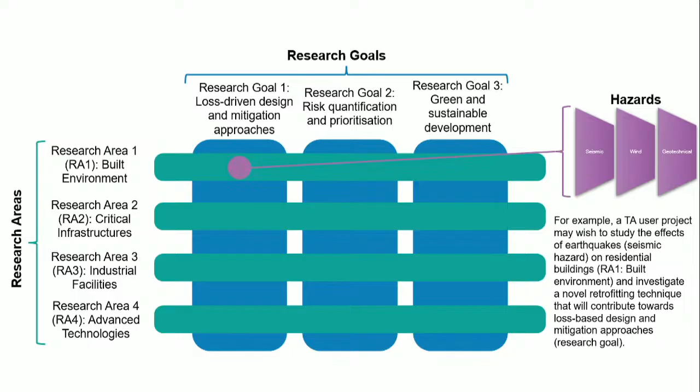Maybe it fits in one of those boxes or many of them, but at least it fits the bigger picture. This is presentable and communicable to people who are non-technical, who are going to make important decisions in the future. I give a simple example here, but all of you could find your own relative example on that slide.

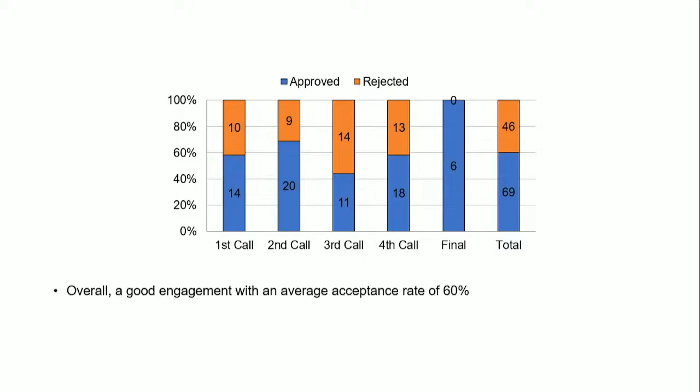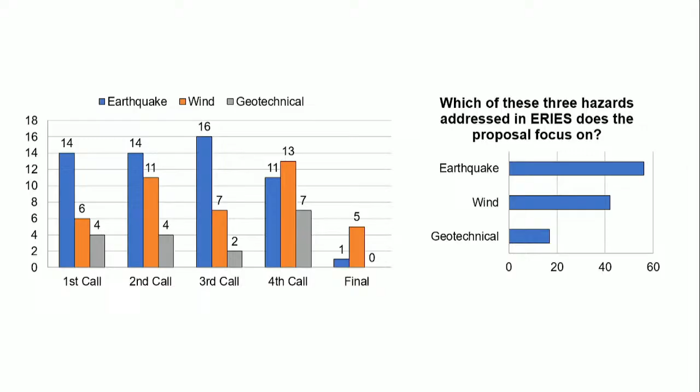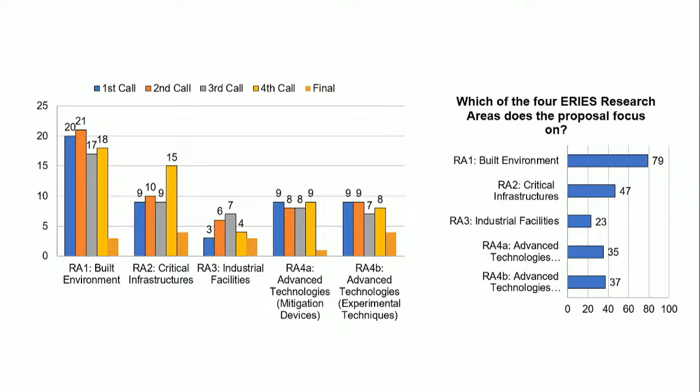In terms of the research areas, you can see the built environment is a lot more popular, I think, because it's related to what we're doing every single day, like the place where we're sitting right now, where we slept last night, maybe where we're going for dinner later on today. This is all the built environment, so I think it's more common, but you can see there's a good interest across the different research areas that we were proposing.

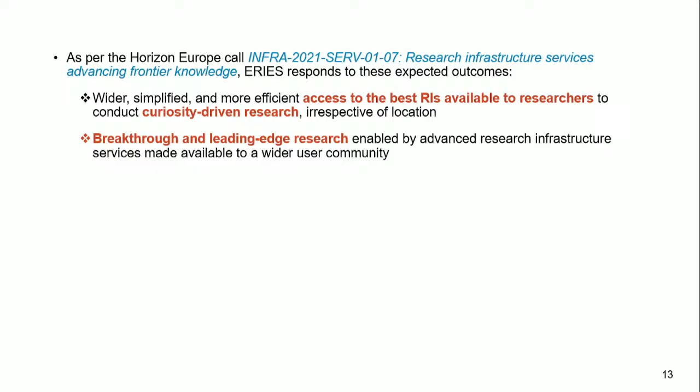So this idea of curiosity-driven research, this is what we're trying to achieve. Breakthrough leading-edge research to enable all of this to happen and to make it available to the wider community. This is what they're trying to focus on. Also to harmonize and have a broader exploitation of the synergies across Europe is something that they're interested in. So you can see on the map on the previous slides, I think we're achieving that. Everybody's working quite well together.

And also a new generation of researchers. So the idea that a lot of young researchers are coming up through the ranks and are involved in a lot of these projects. I think I have some stats in some other slides that I can show another time. And it's one of the reasons why we have this Young Researcher Award, which we'll talk about later on today and tomorrow. But to have a new generation basically trained and that can exploit all these new tools and all these new infrastructures to conduct the research.

And also the cross-disciplinary fertilization. So the idea of the different communities are coming together now, and this is, I think, we've achieved this as well with this project.

Something as well I think we'll talk about tomorrow morning is that the world is becoming more digital. The idea of having all your data on hard drives and in your desk, on your drawer is, let's say, a thought of the past. So something that the European Commission is very interested in doing is everything digital, online, cloud, things like that. So we need to make that transition as well. So that's something that needs to be a core part of the project and something we're trying to do as well as part of this.

So I think I'll close with this. Overall, we have 69 user projects, so we can see there's a lot of impact around that. Over 400 researchers involved. I think there are about 100 of you here today, so it's only about a quarter of the project, the actual involvement in the project.

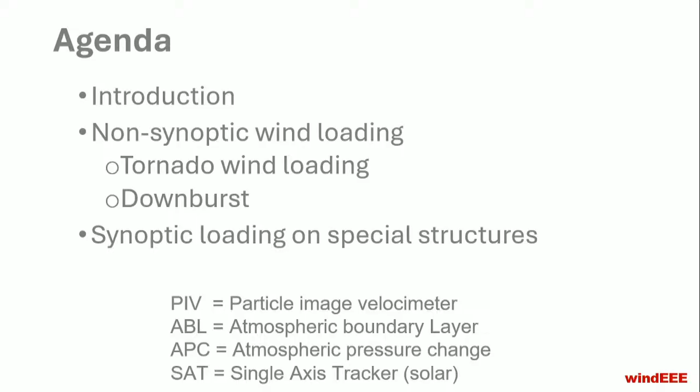Today I'll be focusing on non-synoptic wind loading on structures. In wind engineering, most of the codification and experience was focused on synoptic wind - large wind systems typically called straight wind. But in this ERIES project, many of the projects were focusing on non-stationary, non-synoptic wind, and of course there are a few synoptic wind studies for special structures as well. I'm going to present tornadic type of wind loading, downburst type of wind loading, and synoptic loading on special structures.

This fits into what Gerard was presenting. Primarily, we look into critical infrastructure and design them for wind risk. In wind engineering, our processes are front heavy - the majority of our effort is in evaluating wind load. You have the hazard estimate, and after you quantify what kind of wind system is happening, a big chunk of wind engineering is how that wind system interacts with that specific structure and produces the load. The majority of our research focuses on this aspect.

We used almost for all ERIES projects the WindEEE dome facility. It's a hexagonal, large-scale facility, about the size of this auditorium. Imagine if you have a fan on all walls and on the ceiling - by combining different fans, we can produce different kinds of wind systems. We could do multi-scale testing, whether it's a scaled-down solar panel, a full-scale solar panel, or a scaled-down long span bridge, and things like that. It's a 3-floor system: the first floor is a model shop where we make the model, and this hall you see here is a turntable and a lift that goes down to the model shop where we make our model and install it.

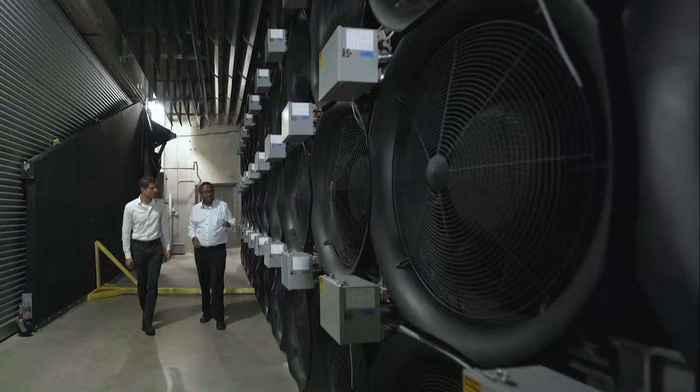For downburst, the reverse is happening. Just to give you some perspective, for straight wind generation, we have one wall that has 60 fans with 1 meter diameter, with active grid and passive.

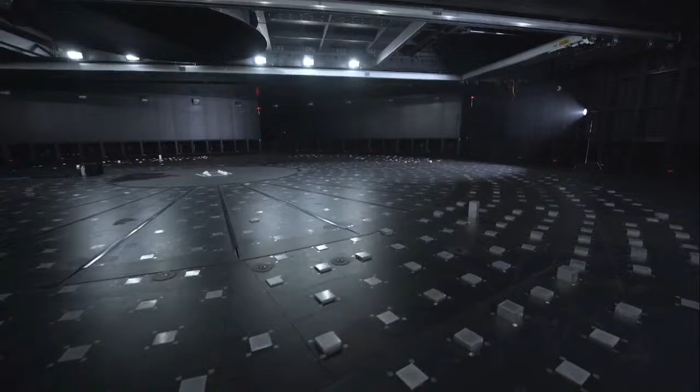As in typical wind tunnels, by the way, our wind tunnels for wind engineering application are different from aerospace, by the way we generate turbulence. We deal with the most chaotic flow out there, so we have passive systems like ground roughness or some active turbulence generation system and things like that.

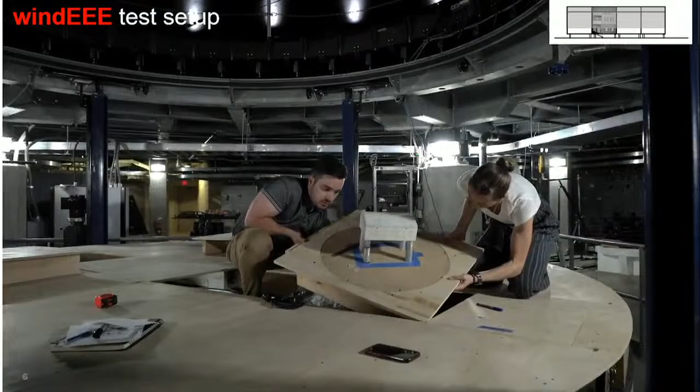Just to give you a perspective how we do the test, this is a building getting ready for downburst testing. We have pressure taps that we connect, and they are simple pressure tubes. As you pull through them on the surface of the building, at the back end you have a pressure transducer, and it picks the pressure difference. That's how, when you integrate the pressure, you get the loading.

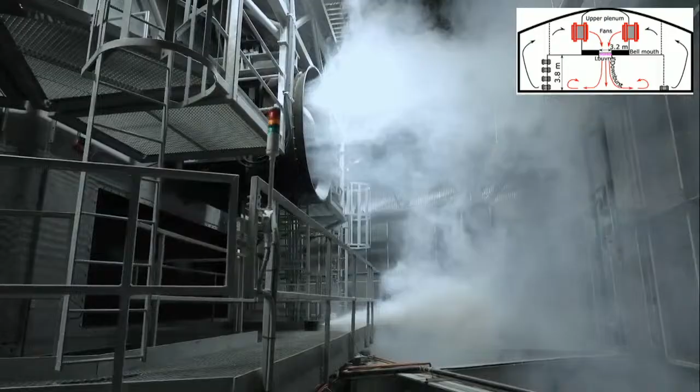This is a typical downburst testing on that particular building. To visualize wind, you have to put something in the tunnel, otherwise wind is invisible. We use staging smoke that artists use to visualize it. It's a tornado simulation.

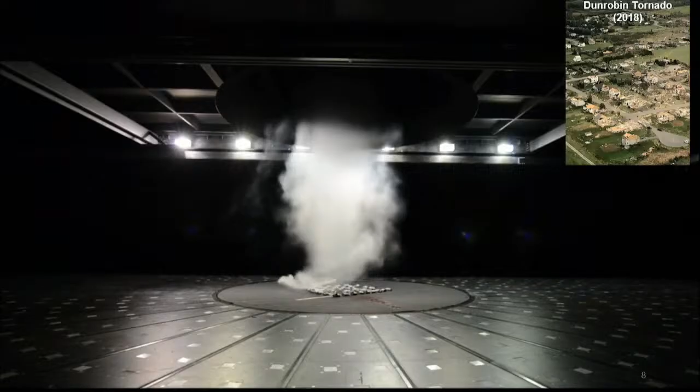Yes, I will start to distinguish the 3 different wind systems. In typical synoptic ABL, what you see is a wind flow affected by the ground. Close to the ground, it is 0. Depending on the roughness, the chaoticness, the turbulence could be high.

For example, wind in Lisbon could be more chaotic. When you go to the countryside, the turbulence will reduce. And when you have this type of wind interacting with a bluff body, it has a signature aerodynamic distribution, a pressure distribution. Of course, that distribution is dependent on the shape of the building,

but this derives the majority of the bluff body characteristics. When you look at downburst, basically you have a jet coming from the sky and hitting the ground and laterally expanding. Strictly speaking, it's like a donut type of vortex descending down, and when it hits the ground, it laterally expands. And when it is far from the center, it develops into something that looks like a boundary layer, but it evolves from a downflow to strong horizontal flow with maximum velocity near the ground, and that's what makes it problematic.

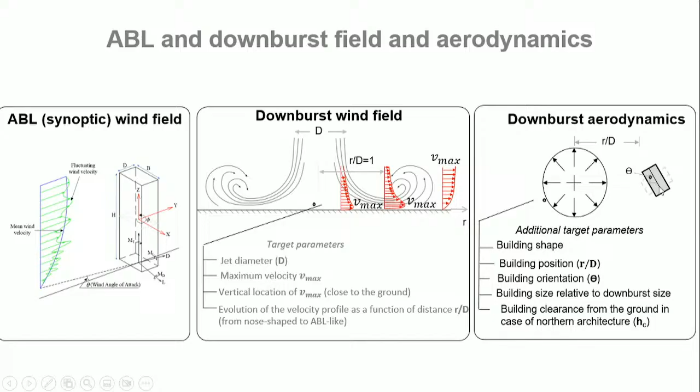And depending on where the building is located, in relation to those radial directions, how the building is oriented, the load could be different, and we look into all these parameters. When you deal with tornado, it is even more complex.

It's a three-dimensional vortex type of flow. Yes, hurricanes are also like tornado, but a hurricane is almost the size of Texas or maybe Europe. Then any building in front of those kind of massive systems doesn't feel the rotation, it comes as only a wind direction, and we treat it as a straight wind.

But when you look at tornado, they are the size on the order of a building, they range from maybe 50 meters, 100 meters, to a couple of kilometers. So that's on the order of the building. Then that three-dimensionality of the flow will impact the load distribution, and we need to capture that.

Then how do we characterize it? It is a rotating updraft characterized by a significant drop in the pressure, atmospheric pressure. That's what this variation shows.

Then when you look at the velocity distribution, it is three-dimensional. There is a radial flow, there is a tangential flow, perhaps the strongest, and there is updraft. There are three components, and we need to capture them.

If we pay attention to how the strongest velocity component, the tangential velocity, varies with height, it follows this distribution. Again, like downburst, close to the ground it produces significant velocity. That's why we are interested in tornado. And if you look at the radial variation, it starts from zero, peaks at a radius called the core radius, and gradually dissipates.

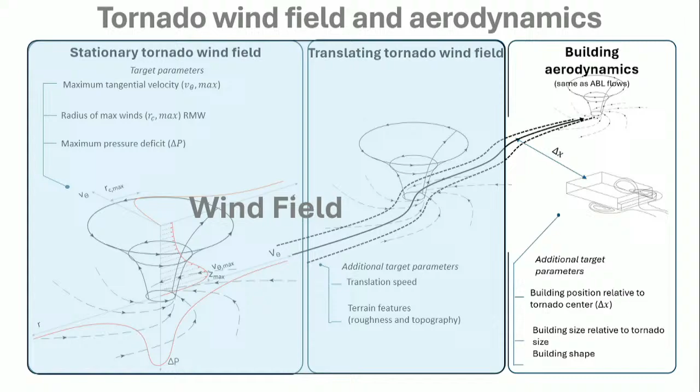This wind system is also translating, so you have the translation component. Since it's a very small system, whether a tornado is passing over the building, how far it is from the building, how big it is compared to the building, all these are parameters we have to deal with to assess the wind load. Having provided the theoretical background, I'll jump into some of the projects we've been working on.

Perhaps another visualization of the flow for tornado. When you zoom in on the structure of the tornado, there is an inflow this way. This region is the inflow region, and it goes up, and depending on the swirl ratio and the structure, there is a downdraft. This is just at the touchdown, so you have this kind of flow structure in a tornado.

What makes this very difficult during the experiment is that measuring the wind field itself is a big challenge. Most of you who spend time in the wind tunnel use Cobra probes or hot wire anemometers and things like that. Majority of those measurements are directional. In straight wind, we know where the wind is coming from and we orient it and measure. But with this kind of system, it's three-dimensional and very difficult to measure with those traditional techniques.

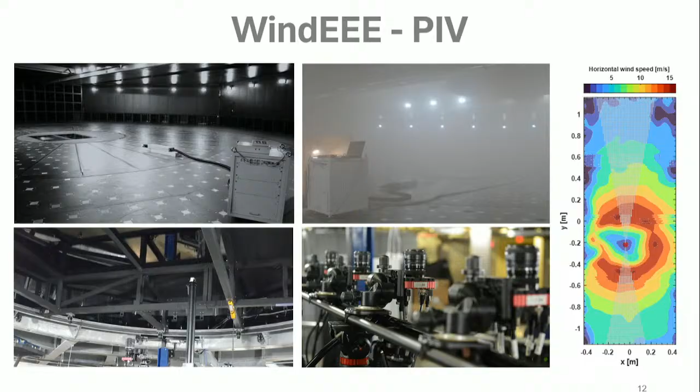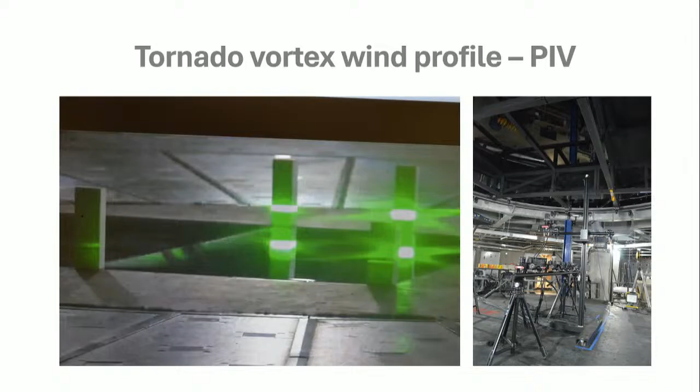So what we did was develop, not the standard PIV system, but modify the PIV system to work on a large scale. We use theatrical smoke as seeding and fill the room with it, and use this kind of laser light. Underneath the turntable there is glass, and underneath that you have cameras, and by monitoring the particle movement we can measure the velocity. That's how we characterize the tornadic wind flow.

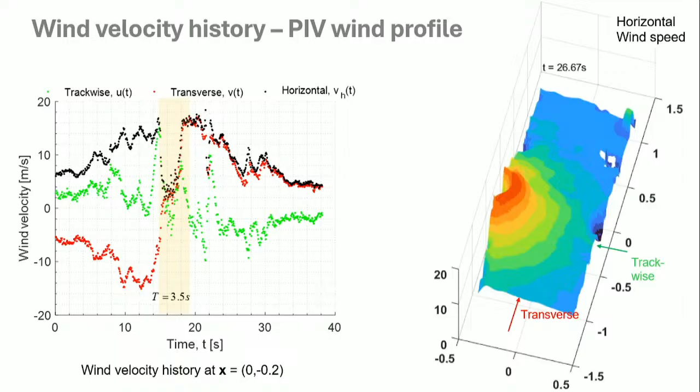I brought two projects. One is the ERIES TNG, tornado near-ground measurement, with University of Birmingham and some universities in the US, and ERIES Solar with 3 universities in Europe - Zagreb University, the Von Karman Institute, and Felix here, La Coruña University. We did both straight wind, tornado, downburst, and Bora wind.

I learned about Bora from Hrvoje - I never knew there was a wind called Bora. He has field measurements; he came and we were able to reproduce it.

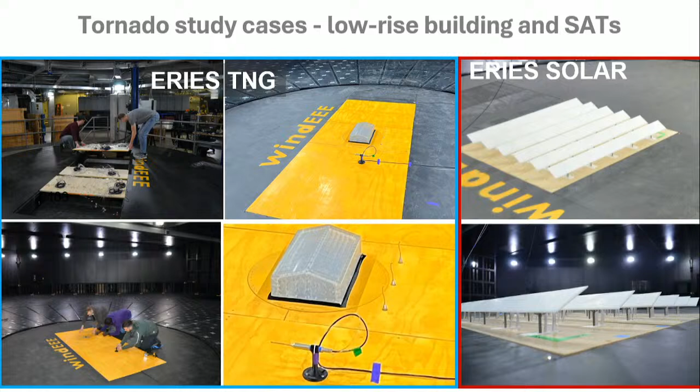When we did this, it was the first time a tornado and downburst test was carried out on solar arrays. For the tornado study, in addition to the building, we put pressure taps on the ground as well - that's what these engineers are doing. When you flip the floor, you could see the tubes.

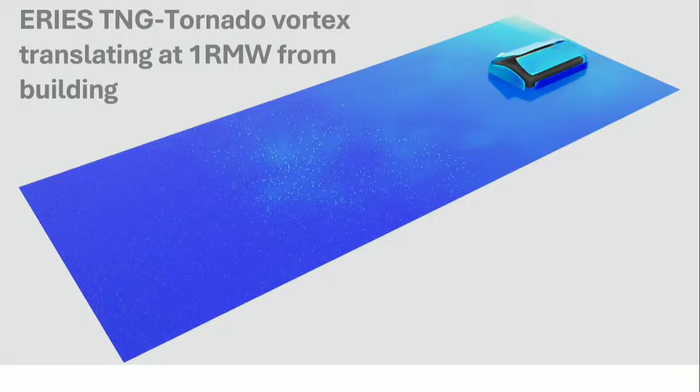I did an animation of the tornado using NVIDIA Omniverse. As you see, the tornado is migrating at a distance, at a radius of maximum wind velocity, and when it hits the building you see this kind of pressure distribution. I have another simulation - this time the tornado is passing through the building.

By the way, there is no codification in Eurocode - Mihaly was talking about that. ASCE developed a tornado provision, but it's primarily based on synoptic wind, not tornadic wind experiments, just synoptic data and some engineering judgment. With this kind of data we'll improve those provisions. As we speak, this is encouraging us to establish a codification as part of the National Building Code of Canada, and I know Mark Sterling and his team and many in this room may in the future work to make it part of the Eurocode.

What's interesting about this project, personally, is that it made us work together. We had 8 projects, finished 5 of them, and are now working with Professor Ricciardelli on the 6th. During this time we worked with 10 different universities, and expect to work with 6 more. The experience exchange that's happening, the inspiration we get from our visitors and our students get from all this collaboration, is immeasurable. It's been a blast for us these last two years.

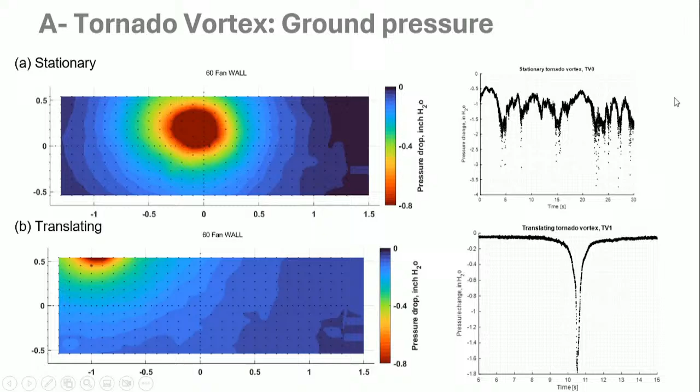When you have this kind of non-stationary data, you have to go back to the drawing board. All your peak calculation, the way you understand CP and everything have to be revisited once again. Can you imagine when the tornado wanders and you repeat the simulation at the wind lab, it will never pass on the same path. It will shift, so we interpret it as a change in angle of attack. A different location of the tornado would mean it attacks the building at a slightly different angle, either vertically or horizontally. So by repeating those, we cannot treat them as a simple single physical system where the variation is stochastic. It is physically two different events.

So what we are doing to get a representative peak value is, if you take these two taps, this is for different repeats. This is the time history of the pressure, and you have this kind of variation when you repeat the test. So we are enveloping, and the envelope represents the peak.

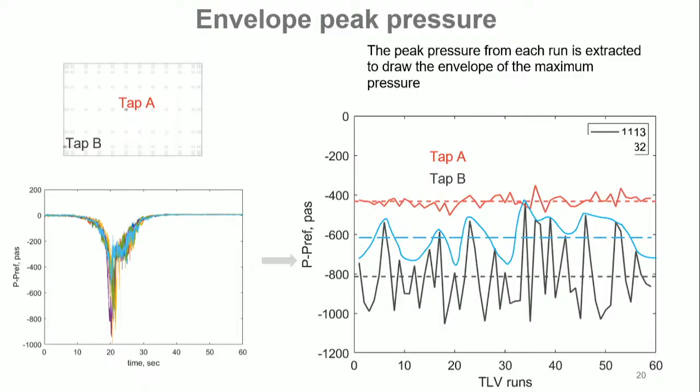When I see Gerard coming, I think I have to rush.

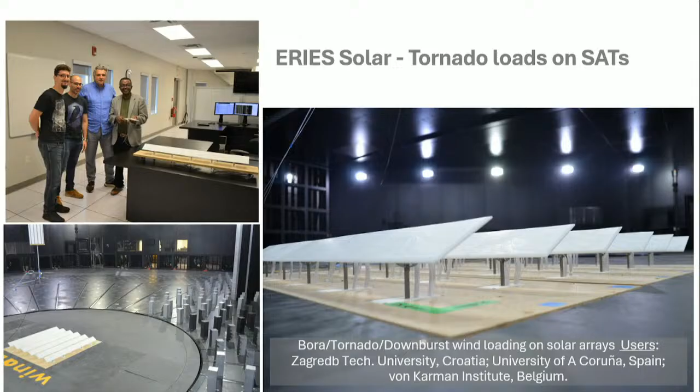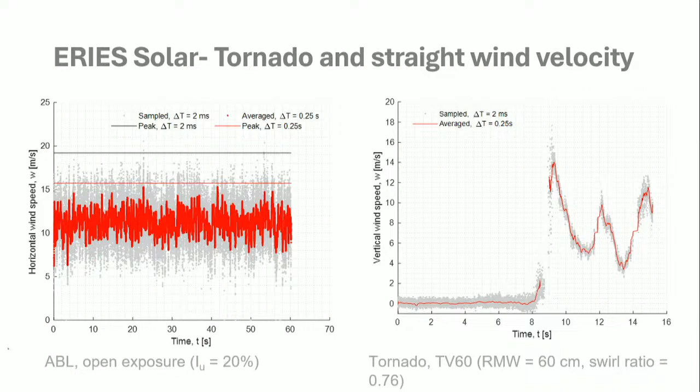Just for visual comparison, this is a tornado load on the solar array, and this is a straight wind load. In this way, we can literally design in the future when you see these big solar farms sprawling in tornado-prone or downburst-prone areas, and we need to design for those kinds of wind systems, and I think these ERIES projects are helping us do that.

There was also another interesting part to this project led by the von Karman Institute for Fluid Dynamics. They are putting anemometers on drones to try to characterize the wind field in this type of problematic wind field. We did this kind of experiment as well.

And I encourage you to attend, Felix, Hrvoje. I didn't see the von Karman group. Perhaps they are here. Please attend for more details.

We also did downburst testing on a communication tower with the Bucharest team. And Anne-Catherine, I saw her there.

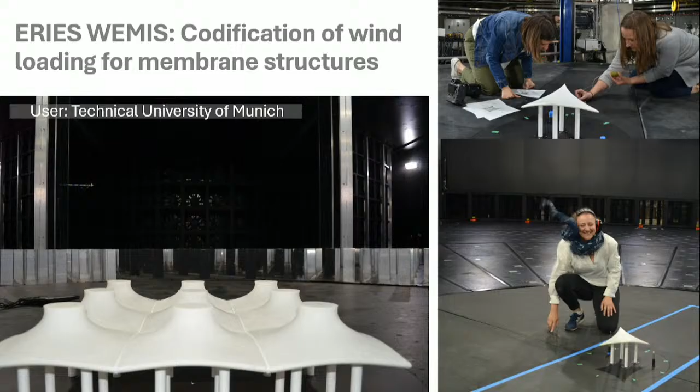Technical University of Munich, they are experts in form-finding membranes. Unfortunately, for this kind of structure, there is no codification, there is no wind load provision. So Anne-Catherine came with 5 or 6 different types of shapes, and we did downburst, tornado, but primarily synoptic type of loading on these kinds of unique structures.

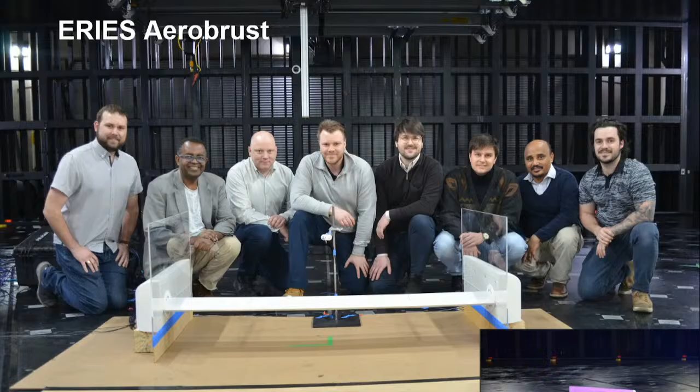And the last project that we just recently completed was the AeroBurst project, where we looked into the impact of downburst loading on a long span bridge section with NTNU from Norway.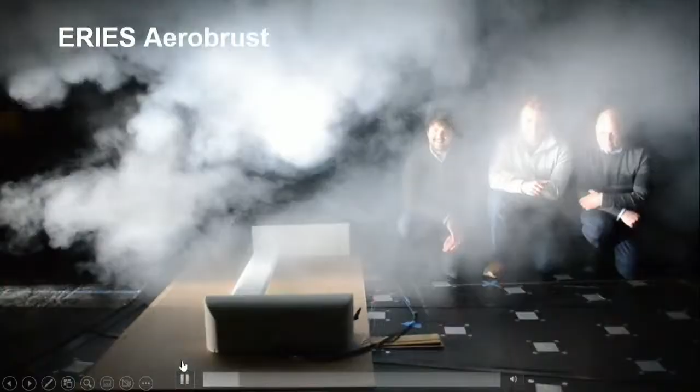This team is monitoring a long span bridge, and they observed a 5-meter deflection because of this kind of local wind system. That was the inspiration for them to come and do the testing.

And I can tell you, this is the last slide, by the way. Each one of these groups is involved in a codification group. For example, for the last project, now as part of the International Wind Engineering Association, many of you are part of that, we just created a non-stationary loading on large civil infrastructure committee, just a precursor to codification.

With that, I will stop my presentation. Thank you for your attention. If there are any questions.

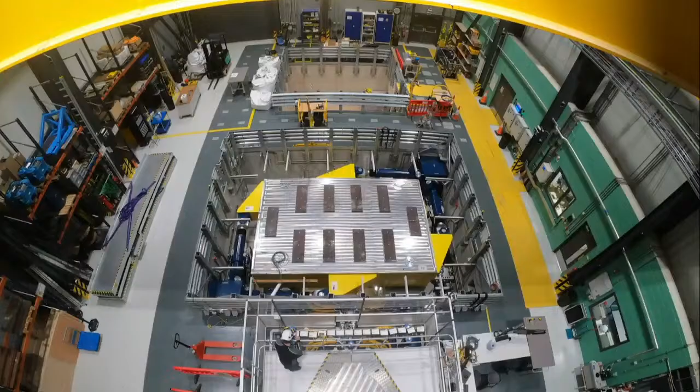The new laboratory at the University of Bristol started being constructed in 2018. It's a 15 million euro investment. Everything seemed to be going pretty well until multiple hazards like Brexit and the pandemic made the construction more complex. But at the end, I think this is the installation that we're offering to ERIES, and it is quite complementary and versatile, as you're going to see.

There are three main entities in this laboratory. One is the shaking table, sometimes equipped with a shear stack to be able to test soil structure interaction problems with bottom-up excitation.

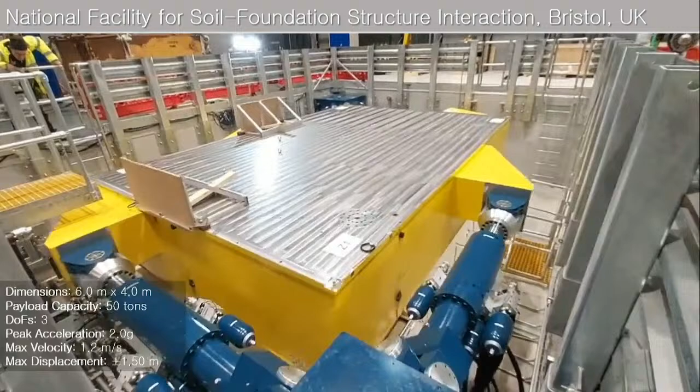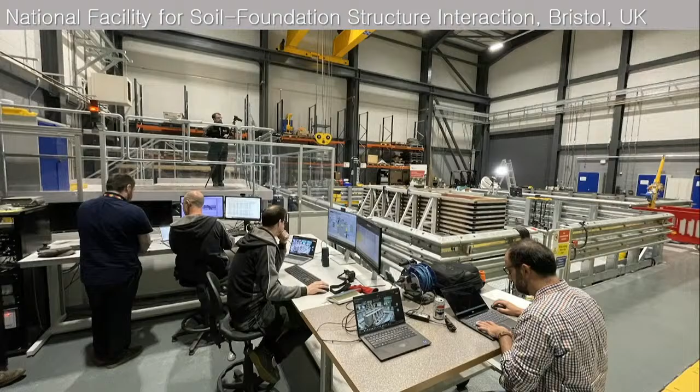This is a 6x4 shaking table. It's a 50-ton table. Obviously, there are many other tables in the world right now that have similar size. Needless to say, an order of magnitude larger shaking tables exist in Asia, so there's no comparison with what we can see in China and in Japan, in fairness. But it fits the purpose for the research that we do.

I think sometimes it's not just the size, it's also the way that you devise the problem you're going to study, and like Gerald nicely said, to do something that is curiosity-driven, because this is essentially what is driving research and novelty, and obviously without underestimating the size of the problem.

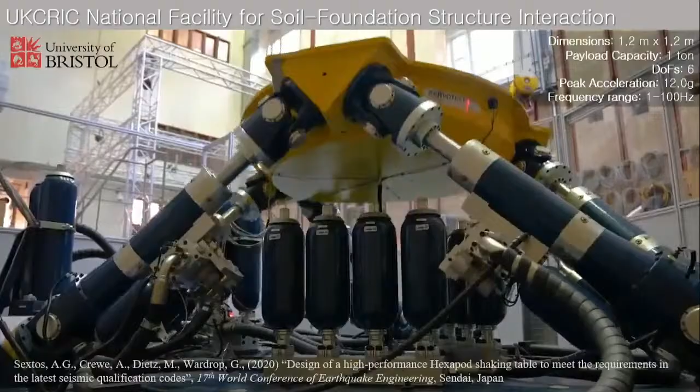But talking about the size, this is the small mini monster, if you like, which is 1.2 by 1.2 meters area, a small hexapod shaking table at the University of Bristol, which goes up to 12 G. So this gives the diversity I was talking about, facilitating testing of equipment or applying large accelerations at a higher floor and the like.

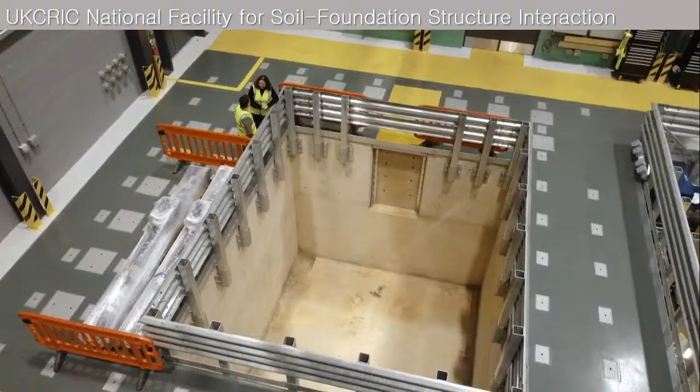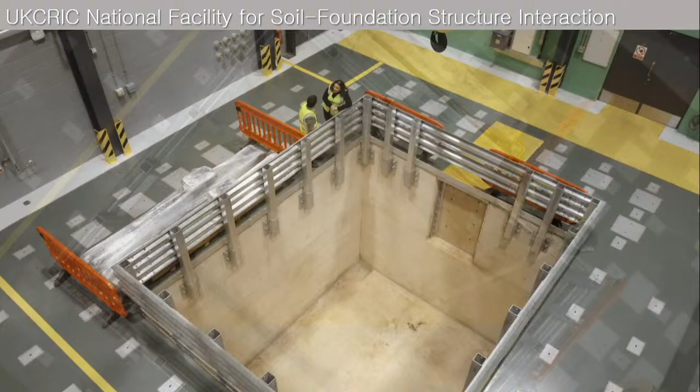And then, of course, the soil pit, which is something that diversifies this laboratory quite substantially. There is another very large soil pit in Germany, Hanover, by Fraunhofer, mostly for offshore wind turbines. Ours is a little bit different, it's smaller. It is something that you can fill with sand; particularly clay would be harder.

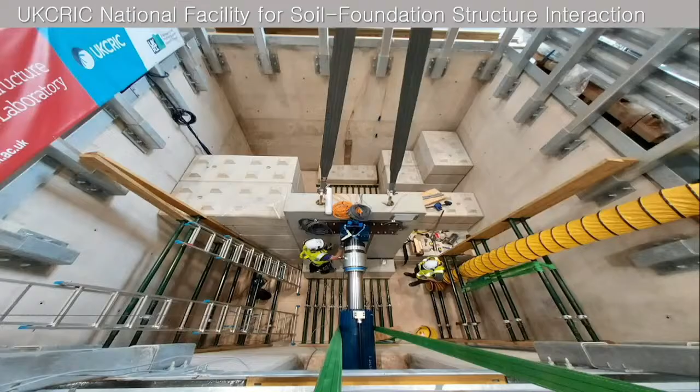But essentially, you can apply loads either laterally for the case of a bridge abutment or a retaining wall, or you can apply loads from top to bottom for a wind turbine, onshore or offshore, or for a buried pipeline, for various types of projects. And this is pretty much how it looks like when you do tests in the soil pit.

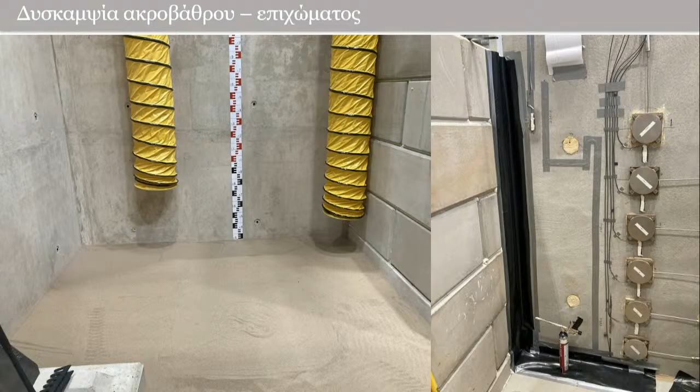So these were the installations that were offered in the framework of ERIES. It looks very simple to empty the pit and fill it with vacuums and shovels and all that equipment, but I can tell you that it takes quite some time to do this, and also to compact it properly and measure it properly and do all the job as needed.

It's kind of a smart pit in that it has fiber optics and load cells all around, accelerometers, and other buried measuring devices. This gives a very well-controlled estimate of the performance of soil structure interacting systems.

Now, going to the individual projects that we served during the ERIES period, I have to say that Luigi just asked me previously, how many projects have you completed? And the answer was 1.5, which means one — this is the one that Professor George Mylonakis is going to talk to you about tomorrow morning, so I'm not going to spoil it, just give you the overview. The others are ready to be tested this summer and this fall.

The reason is that, as you're going to see, they're very multidisciplinary and quite complex. All projects, obviously, are complex, but I think these particular ones required a lot of design to de-risk, and as you know very well, that takes quite some time.

So for the Scour and Shake project in particular, which is led by Politecnico Milano, Maria Pina Limongelli, and also by our colleague Dimitris Karamitros in Bristol — just to say that we thought it's good practice for every different project to be allocated to a different colleague to run and manage it, because it's impossible for all this to be done with few people.

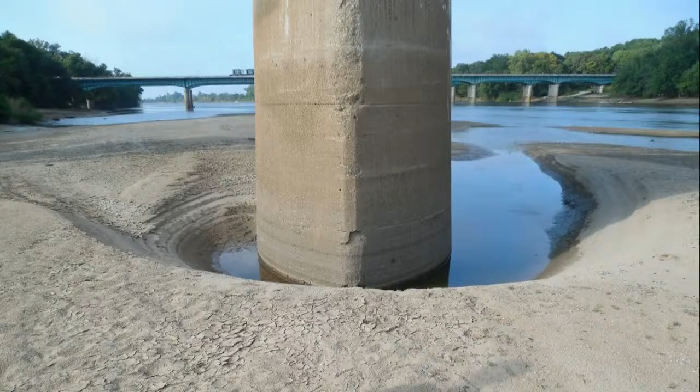So the idea here is effectively how scour can affect or undermine the seismic capacity of bridges. This is to cut the long story short.

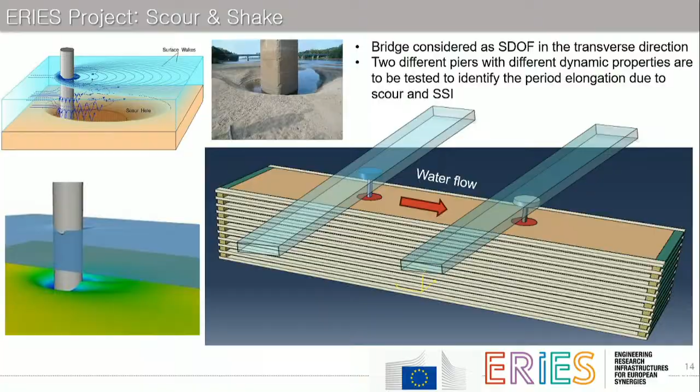I'm not going to get into the mechanics at all, because George is going to present this tomorrow in detail, but essentially it's a test that looks pretty simple, if you like. It's a shear stack with some single degree of freedom systems and a scour that is mechanically excavated, and that's the instrumentation, which looks straightforward. But as George is going to tell you tomorrow, it looks simple, but it's not simple at all to be meaningful, to scale it properly, and to learn something that we don't already know.

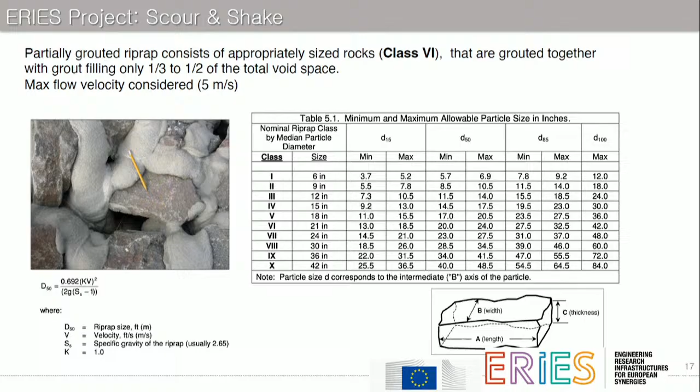So, as I promised, I'm not going to spoil George. You're going to do that tomorrow. You're also going to talk about remedial measures and what we can do, perhaps, to mitigate this effect and improve, or let's say, drive the scour soil structure interaction in our favor. So this is the purpose of this specific project.

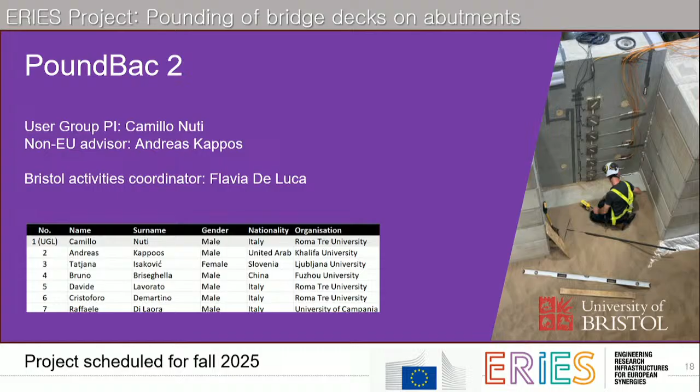The other project, which is also something we find quite interesting, with the user group led by Camillo Nuti, with non-EU advisor from Abu Dhabi, Professor Andreas Kappos. This is coordinated by our colleague and friend, Professor Flavia De Luca, and a list of people who have great contribution in this project.

So this is pretty much about what happens when a bridge deck exhausts the seismic gap and creates impact on the backwall. This is quite a complex problem. As you know, in the codes, there are many, many things that we don't actually address in this problem, for reasons of complexity on what's happening behind the wall in particular.

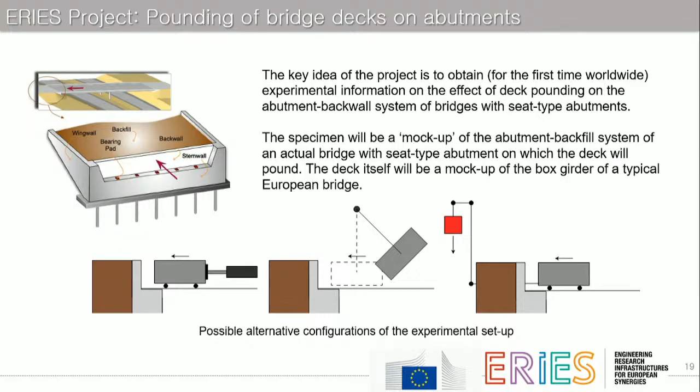So the idea was to generate a system that will create this large-scale test to be able to learn some things that we don't know. For example, what is the duration of pounding? What is the coefficient of restitution? How does the coefficient of restitution change because of multiple closings of the gap and multiple impacts? And what is the rotational stiffness, the dynamic rotational stiffness of this footing?

Because I can tell you in advance that the more the footing rotates because of soil structure interaction, the whole mass that is activated behind the wall has a different shape and a different volume. So we're talking about a pounding problem with mass 1 of the deck and mass 2 of the backfill. Mass 2 is the greatest unknown of the problem, and this depends on the supporting conditions.

This is something you can only effectively experimentally identify, because numerically this is your input. So this was one of the important things to try to capture in this problem.

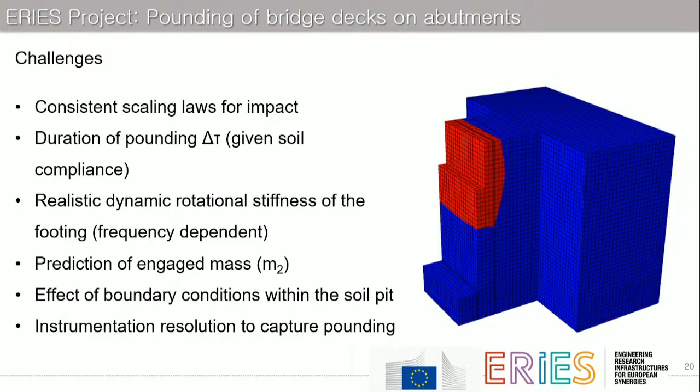But there are also challenges. One, to be able to instrument this problem properly, because all this impact happens very, very quickly. And you have to be able to capture this pounding, and also make it realistic enough, scale in terms of momentum ideally, and be able to extrapolate the results.

You can see here our modular design of the stem wall and the back wall, and we have several different types of abutments mimicking, if you like, the kind of continuous stem wall back wall system that we've got in Europe, or in contrast, the Caltrans-based system where the back wall at the top is sacrificial, it's just sheared off after pounding, so the mass that is activated is just very superficial.

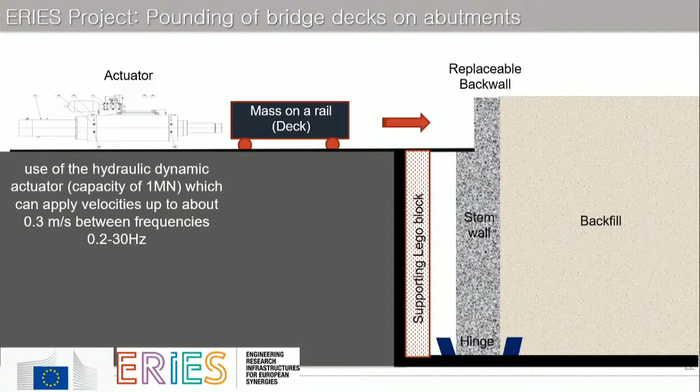So between these two extremes, we thought essentially and initially, let us have a large mass, drive the actuator, and just throw the mass and see what happens. But you would never solve this problem like this, because obviously there are going to be some rebouncing of the mass against your expensive actuator. Then it will be hard to repeat the test. So everybody who is dealing with experimental mechanics knows that this would be something to avoid.

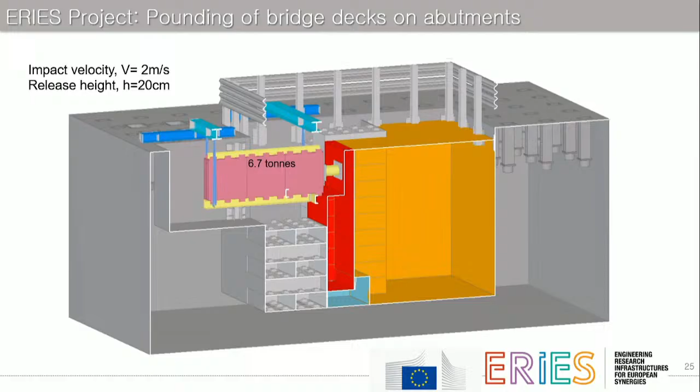So that looks very nice to create a sketch, but essentially that's not what we decided to do. We thought it's better to just use gravity in a very well-controlled way, minimizing the eccentricity, have a hanging mass that we can calculate like 20 centimeters from the top, mimic the momentum that we're going to get, and create a pounding like this. This is what we actually designed to do, and all the design has been completed, footprints to the maximum detail.

There are many, many questions. What should be the material that we're going to use at the impact point? How are we going to distribute the force so that we make it an equivalent pressure? How are we going to measure the coefficient of restitution, and all the other challenging aspects?

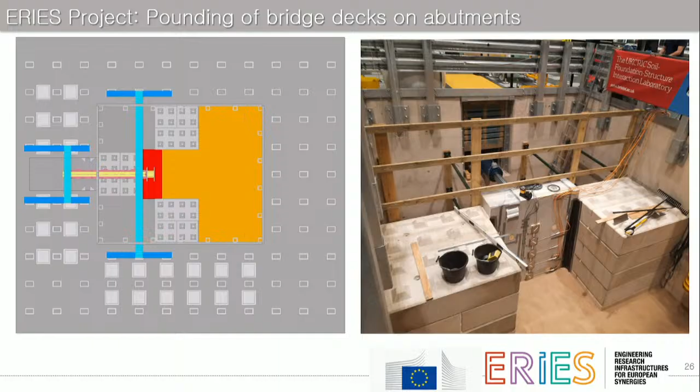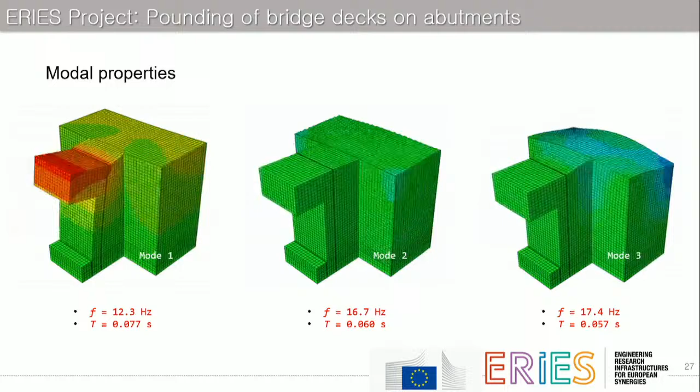Obviously we need to do numerical work to de-risk, but effectively there are some practical problems we have to address. You can already imagine that the soil pit is small, so there are going to be some reflections at the boundary of the wall that will be interfering with the things that we'll be measuring.

So we had to design everything very carefully, identifying all the parameters: the tangential friction, the properties of impact, the duration of impact, numerically, the effect of the boundary walls, practically to assess in advance how much time we have, what is the time window we can use that is not subject to interference from reflecting and superimposing waves from the boundary. This pit is small, but large enough to study the things we want to study.

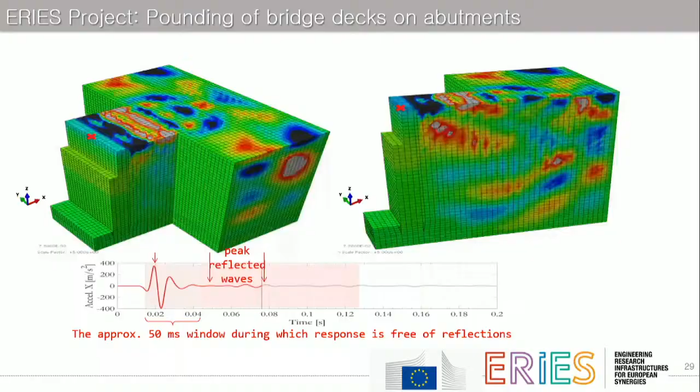But this is just evidence of all the work that has to be done to de-risk such a test. You can see here how, like I mentioned previously, the participating mass changes because of the rotational conditions at the end, the dynamic stiffness of the soil structure interaction system.

That's quite interesting, because when we're designing bridges and we want to identify a spring or a dashpot at the end of the abutment, somehow we need to calculate how much this mass is. And that's something we basically don't know.

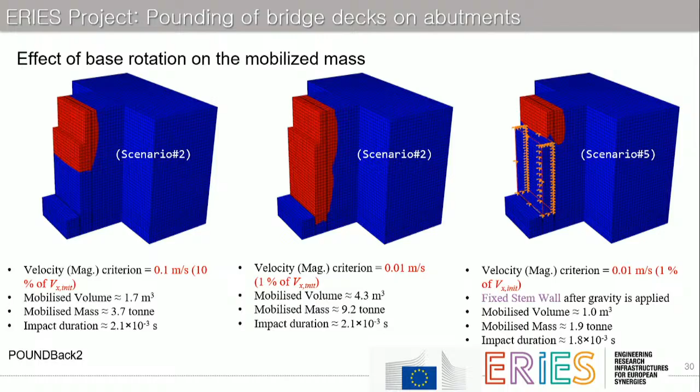Now, going to something very different, this is a third kind of test. This is the half I mentioned. We did 50%, a 3D printed unit. In this case, it is led by the University of Porto, Professor Humberto Varum, and from the side of Bristol, it is led by Professor Raffaele De Risi, and a list of good colleagues who have contributed to this project.

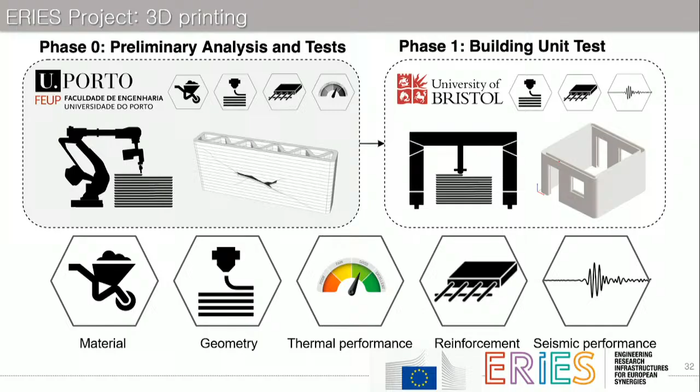And effectively, it is about what is the strength of buildings that we 3D print. We know that we can 3D print them, but are they suitable for seismic regions? So there is an excellent cooperation with the University of Porto in this case.

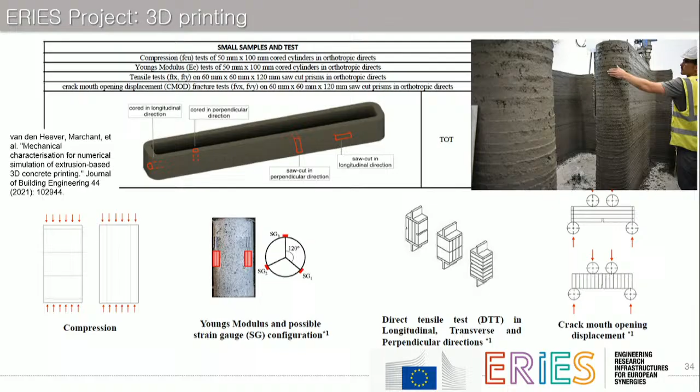Many, many things to take into account. Effectively, it's also the speed that the nozzle is moving, the quality of the concrete, whether it changes strength by height, what are the different properties in plane and out of plane, what is the property of the void.

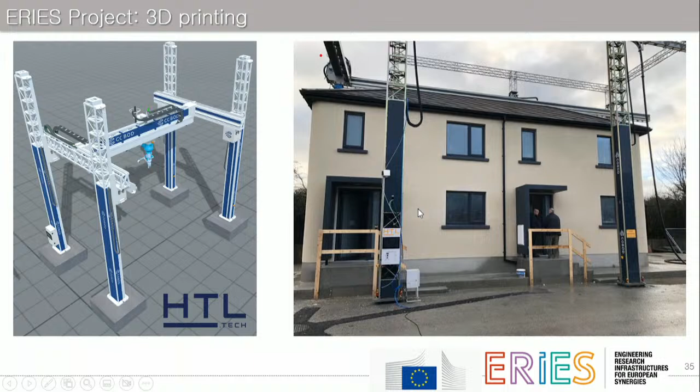And this is the 3D printer that this industrial partner, HTL, introduced in the project. These guys are an Irish company. They have been quite keen in printing the unit that you can see on the right.

And these guys are quite keen, like I said, to print, so they have even printed their own headquarters, which looks like what you see in the picture on the right.

And then before doing the printing for us, there was extensive work done at the University of Porto identifying the properties, the material properties. Why? Because somehow we had to know what the material properties and sectional behavior were before we designed the 3D printed unit, to make sure that we would be able to damage it.

Because we also have some limited capacity. We can test up to 50 tons, up to 2G, that's it. So if we couldn't reach the threshold of damage, it's a pointless test. We're just going to have a rigid block moving.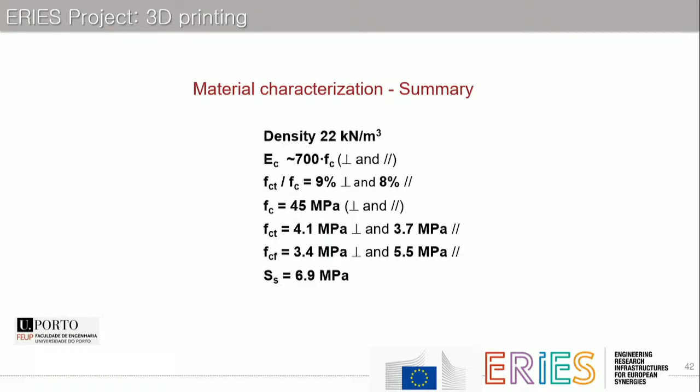So that's why this component testing involving compressive strength tests, diagonal tests, panel tests, 4-point bending tests, and the like, a lot of numerical analysis, a lot of prediction. Credit goes here to Raffaele De Risi, who did the vast majority of the work, and Tansu Kokce, who did fantastic work. They even parameterized it with the aid of ASDEA.

You can see here how the design was parameterized with a fantastic tool that Raffaele built, practically playing with the different properties. Shall we introduce more openings? Shall we introduce more mass? Both of them would create more damage, obviously.

And what's the sweet spot, if you like, between something that is realistic enough and at the same time something we can break, to put it like this.

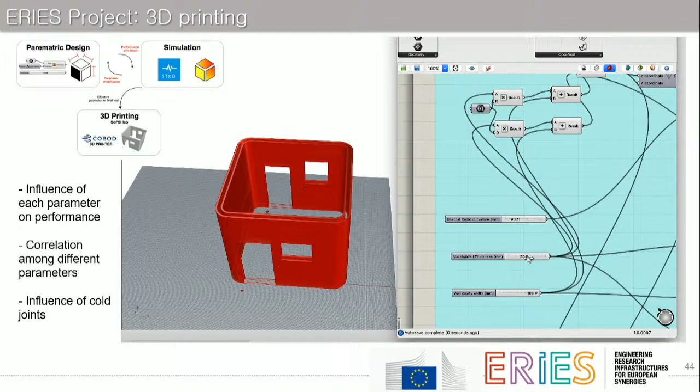So this is the final drawing and the different footprints from the top, cross-sections, expected damage running on the Kahramanmaraş earthquake sequence. That would be the easy choice, but obviously we cannot really overshoot.

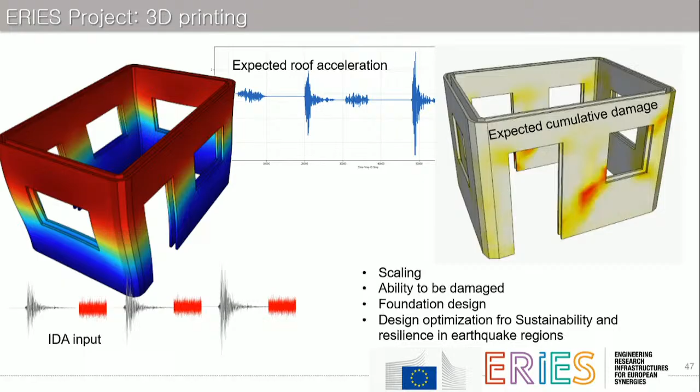This is going to be an incremental dynamic analysis test at the end of the day, starting small, doing everything elastically, and then upscaling little by little.

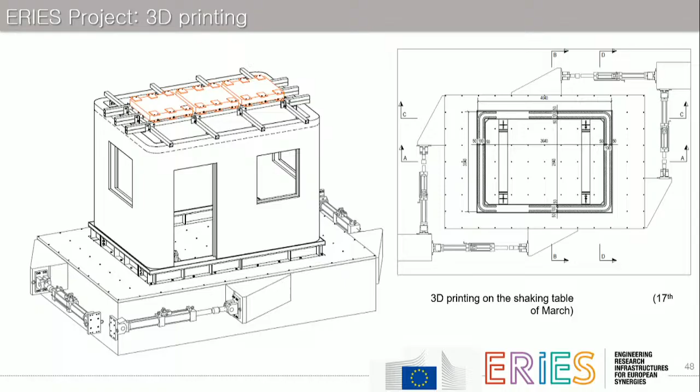That's the final footprint with a mass that you can see on top, currently 3.6 tons, maybe we increase it a little bit. And this is the casting of the footings of the printer.

Something important that I didn't mention: the 3D printer was effectively transported to the lab, rested outside the shaking table, and printed on site. So we didn't have to elevate or carry the whole thing with a crane.

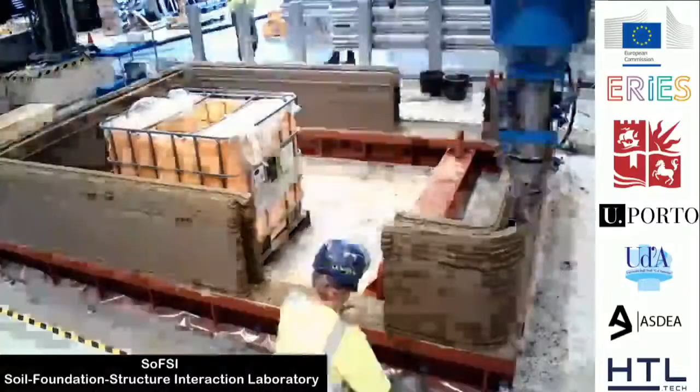And this is the time lapse of the 3D printing of this unit. I can tell you it's not as simple as it looks, because there are many things involved, even in bringing and testing the concrete on site and during construction and the like.

But the good news is that the whole thing is there, printed, waiting to be cast, and there will be more news next month, effectively, or in our next meeting.

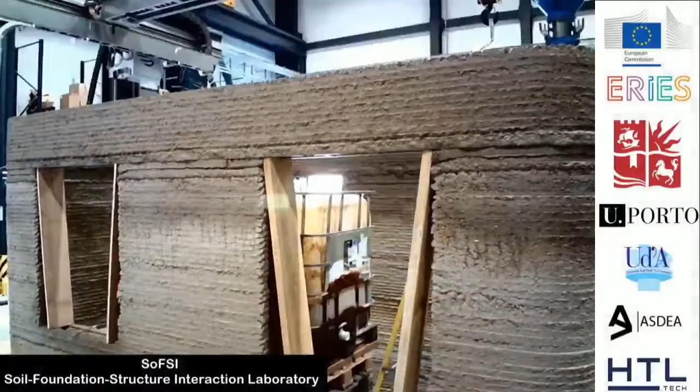It was a very interesting experience. I think overall, in retrospect, that's all very feasible and promising, but it has to be tailored very carefully, because we're talking about structural properties - it's not just about earthquake regions, at least.

And finally, there is this fourth project called Hysterisis. This is led by Professor Ihsan Bal, with the aid of great contributors from other places.

I would name, just for this purpose, Solomon Tesfamariam from Canada, and our friend Oh-Sung Kwon, also from University of Toronto, and also Roberto Tomasi from the Norwegian University of Life Science, because that's actually a kind of a very different project. Ihsan is going to tell you more tomorrow, so I'm not going to say too much.

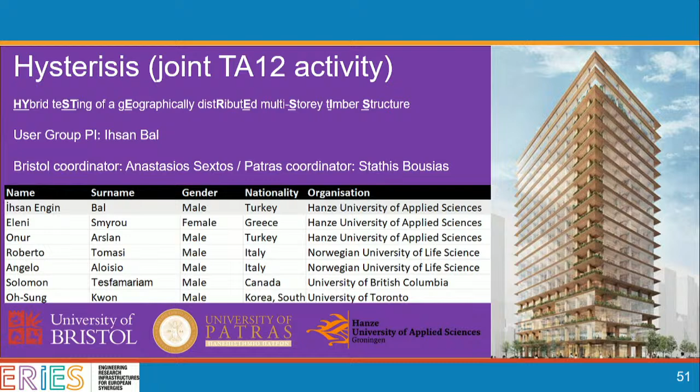Just a little bit about the motivation, because administratively, this is kind of linking two work packages - work package 9, whatever Bristol delivers, and work package 15, which was by design combining and promoting collaboration between different laboratories, that being the University of Patras.

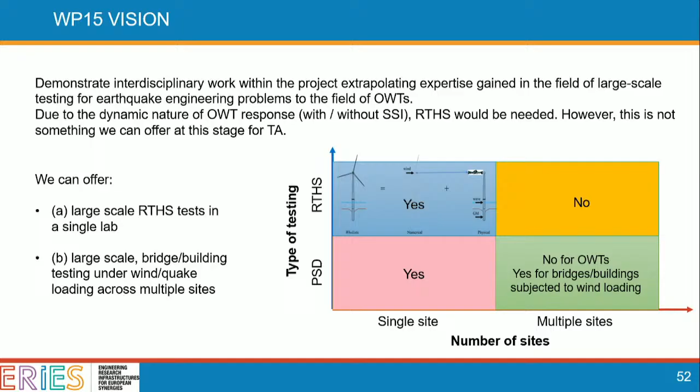Yes, we can offer that. Can we do real-time hybrid testing in multiple sites? Probably not as real time, maybe nearly real with the problems of latency, but pseudodynamic testing we can definitely do in a single site or many sites.

And this is how this has been designed to test something that looks conceptually like what UC San Diego has tested recently - that's a fantastic test of a 10-story timber building in the US.

Our test is conceptually different in that, A, it's substructured - so the argument is you don't have to go that big, you can definitely solve something faster. And secondly, we can account for soil-structure interaction.

So without spoiling too much, and also because I got the message from Gerald sitting in his presidential chair, this is the finalized version of the building we'll be testing.

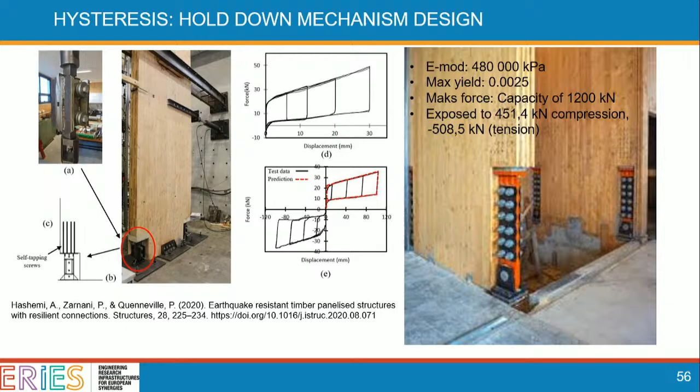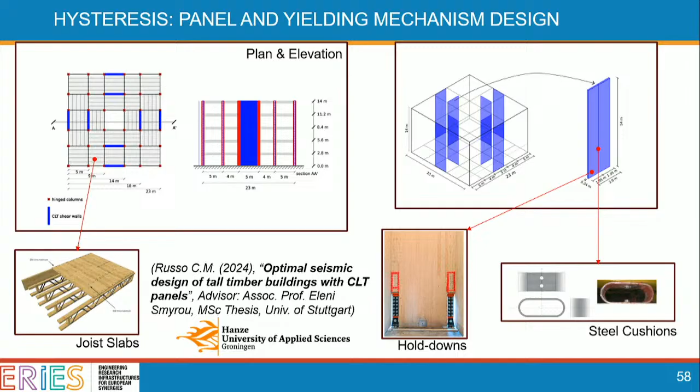This is the envisaged hold-down system that is going to introduce a hierarchy of failure between plasticity of the soil, a little bit of uplift of the foundation, a little bit of yielding of the hold-down mechanism, and also assuming that the panel you see here will remain elastic, the introduction of a damper as an extra connector, as a bracing system, as part of this substructuring process.

And this is my last slide, practically showing, as Isan is going to show you tomorrow, how this is split between countries. So in Bristol, it's going to be the foundation that will be tested, including the soil, the slab, and the hold-down, in smaller scale.

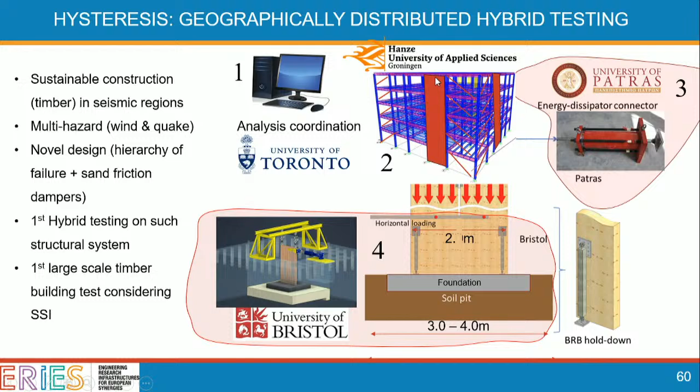The energy dissipator, this is a sand damper in Patras, physically tested, and all the rest of the substructure is tested numerically in Toronto and in Hanze University of Applied Sciences. That's how the footprint looked like.

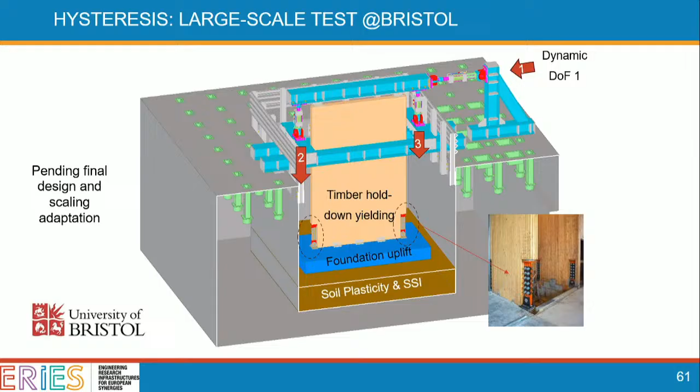This is a test that will take place later this year, definitely before next March, because otherwise I think we'll be in trouble. And this is pretty much how the substructuring looks like. So with that, thank you very much for your attention.